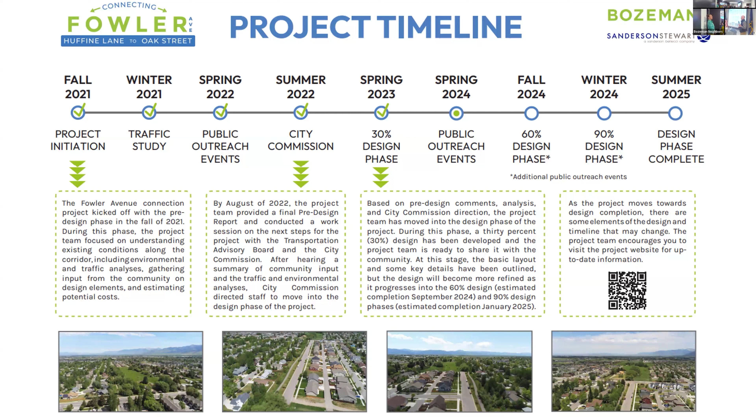Okay, so a little bit of our project timeline. This was one of the boards we presented on your way in. We started the project way back, feels like way back in 2021. Had about 1.5 years worth of engagement in pre-design effort planning phase.

Spent about the last 2 years in our early action design. That gets us to about 30% design phase. That's where we're at tonight. We're engaging right now through the beginning part of this spring, and hopefully have good groundwork to get our consultant, Sanderson Stewart, thanks for being in the room tonight with us, off to 60%, 90%, and target our first phase of construction in 2026.

Okay, so starting back, and again, we really wanted to hammer home how much we did learn from the community in the pre-design phase, not only about the project, but also about the actual engagement itself. So on the left side, that was all of our engagement efforts at that pre-design phase. And on the bottom, we took some really good comments and feedback from this group and from you guys about what we could have done better.

What we heard, a lot of folks didn't know the meetings were happening.

That's a problem, you got to know this meeting's happening in order to come engage with us. We used focus groups in the pre-design effort with stakeholders like HOAs, but some folks who weren't invited felt left out. We certainly didn't want that, so we nixed the focus groups this time. We had a great comment that when there's a site plan or subdivision going in, planning puts signs right there so folks passing by can see and know it's happening. We thought that was a great idea, and we wanted to offer opportunity for you to engage with us in a more formal setting. We heard that last time, so that's what we're doing here tonight.

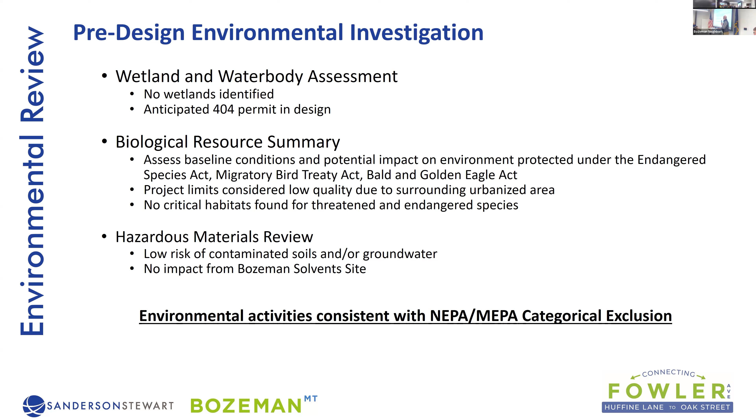At the conclusion of our pre-design phase, we ended up with essentially a list of demands on staff. When all your public comment was heard by the Bozeman City Commission, they did approve the project to move forward, but under a certain set of conditions. One: minimum or maximum of one travel lane in each direction, that's the big one. Left turn lanes will be added or proposed where required or necessary to help ease flow of travel and also safety.

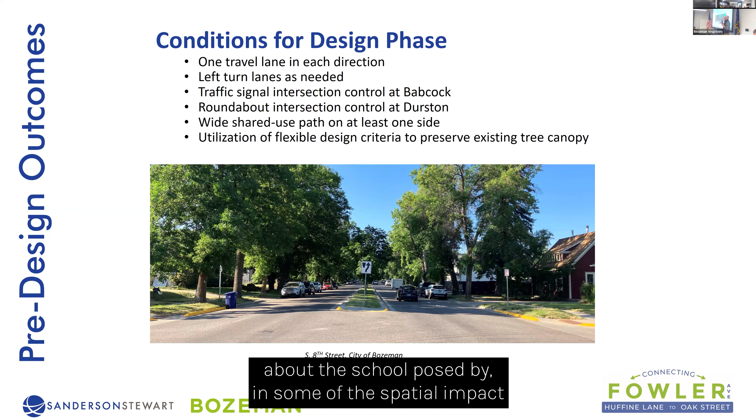We're going to propose a traffic signal be installed at Babcock, that was one of the concerns we heard. We had initially proposed a roundabout, but there were a lot of concerns about the nearby school and the spatial impact a larger roundabout would have in that area. We will be able to fit a roundabout at Durston that more closely aligns with the other intersections along Durston, whereas many of the Babcock intersections are signalized.

We're proposing a wide shared use path in at least one direction. All our projects follow our complete cities, complete streets policy, multimodality is heavily important in all of our corridor projects, and so we'll have continuous protected shared use path on at least one side of the street at all times.

And then finally, the last one is the big one. We heard loud and clear that it was not going to be possible or prudent to just run this 5-lane corridor directly down a straight path. So using flexible design to use available open space to shift the road in and out, primarily to protect the ditch corridor, the open ditch that's there right now, and the trees. That's the big part we hope you take away from our design as we present.

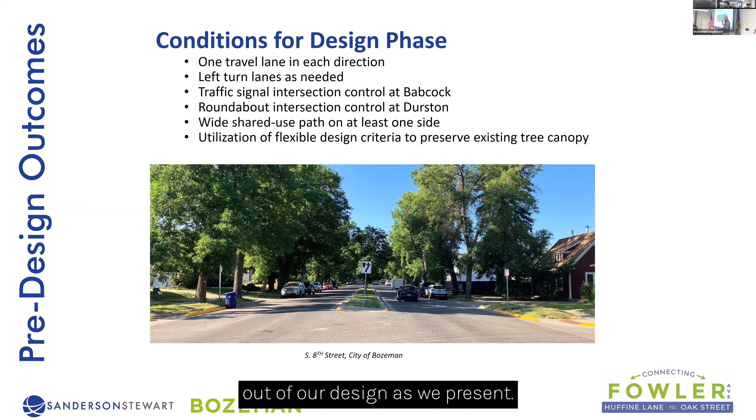Taking all of that into one: if you remember this graphic, this was our conceptual plan at the pre-design phase. You'll see multiple lanes, straight down the Fowler corridor, wide impact. We took your responses and comments and laid out what this could look like in design.

So we said a 2-lane typical section using the existing streets where possible, great idea, let's do it. And if you put a signal in at that point instead of a roundabout, also strong agree, let's go.

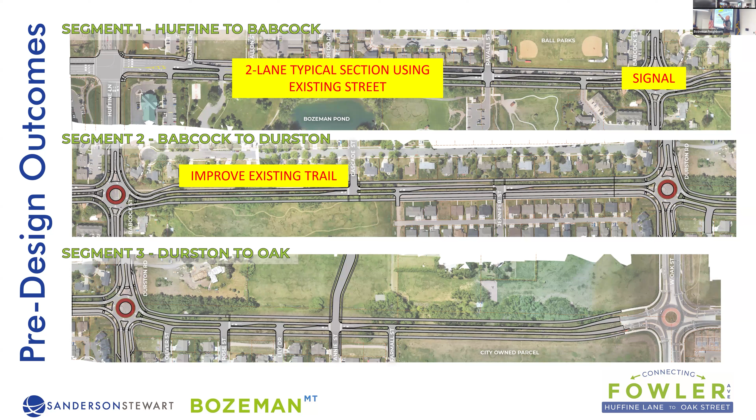Improve the existing trail. One of the critical parts of this corridor is from Babcock up to Durston. We heard loud and clear how much you value that tree corridor and existing trail. We will not be impacting that at all. The vast majority of those trees will remain. The only thing we might do, if agreeable to the community, is improve that trail by paving it.

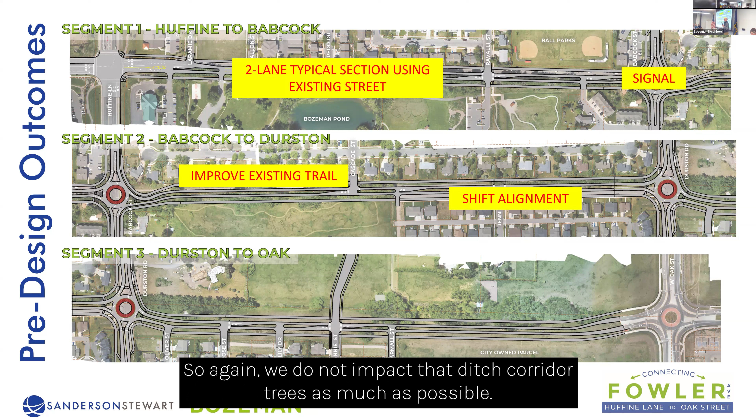That hopefully allows it to be accessible a little longer throughout the year. Then in a section where we shift the alignment, we again do not impact that ditch corridor and trees as much as possible. We also narrow the template as we go towards Oak, reducing the width of the impact. And the big one: maintain the open ditch. We agree, and so does the ditch company. The ditch is going to be maintained open.

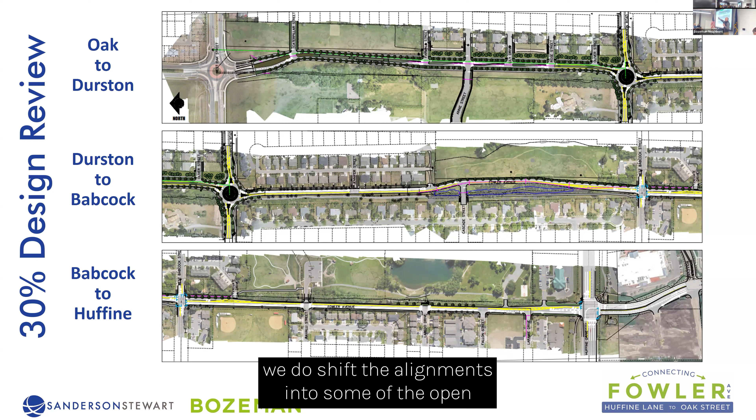That gets us to our new sketch and new map. We switched it around on you - Oak is at the top now. Essentially we took all the comments from pre-design and the conceptual design we had, and revised it to what we see now. As we go along in the next couple slides we'll get into more detail, but starting at the north at Oak, we shift the alignment into some of the open space that exists, so we do not have to pave over the ditch corridor there. That remains open, and the trees remain intact.

We have the roundabout at Durston that then takes us into the existing section of Fowler. We're going to build within curb to curb through that section, so it will not be widened at all. Parking will be maintained along the northbound side of the road for the residents that are there.

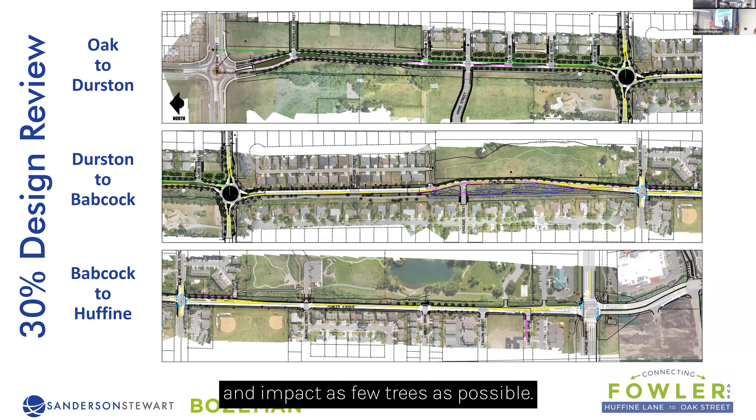Once we get into a bit more open space, we'll use that opportunity to shift the roadway again, to maintain the ditch open and impact as few trees as possible. Then we're back down onto the existing Fowler, south of Babcock as we come into Huffine. That section will also be maintained roughly within the curb to curb width. On the northbound side, if you notice, we don't have any curb there at all, so we will build that in. We'll get some stormwater management so we don't just sheet flow all the stormwater off into the ditch, and largely maintain that street as is.

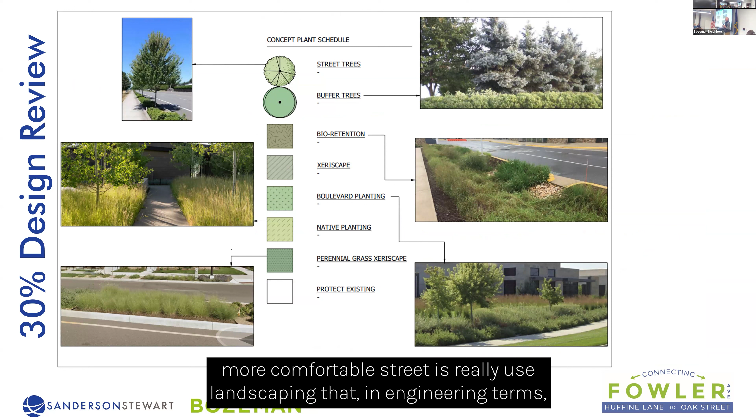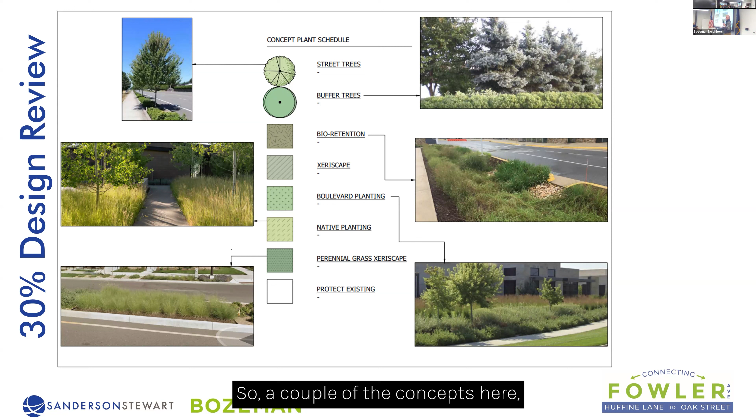One thing we heard loud and clear was that this corridor must be contextually appropriate. One thing we do to make it feel like a safer, calmer, more comfortable street is really use landscaping that, in engineering terms, creates friction to movement. If you pave this big wide stretch of street, it's going to feel like a big wide stretch of street, and that's going to lead to folks maybe not paying attention to the speedometer as much as they should. So we wanted to show early on in the design the landscaping concepts we hope to bring through to final.

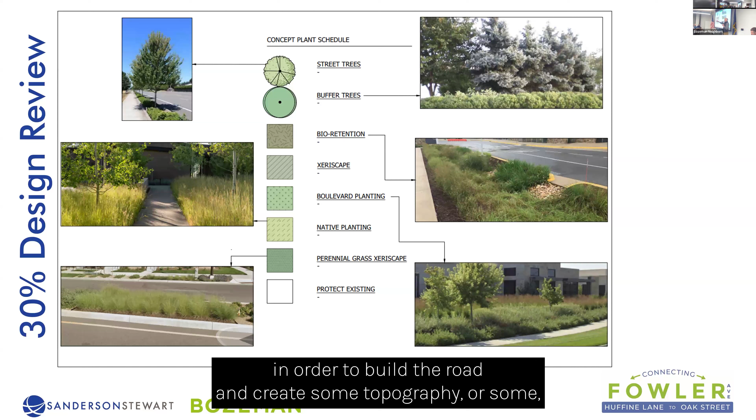A couple of the concepts here: we're using two forms of trees. We have our typical street trees, which go in what we call the boulevard of the street between the curb and the sidewalk. We're also going to utilize some hardier, larger trees we're terming buffer trees. The idea is to fit the road corridor within the space with as little impact to the adjacent homeowners as possible, using topography, maybe taking some of the strippings we have to take off to build the road, and creating some topography, swales and mounds, then planting trees around them. The goal is to keep the visual impact in terms of headlights, and as much of the sound and noise impact, away from the adjacent homeowner.

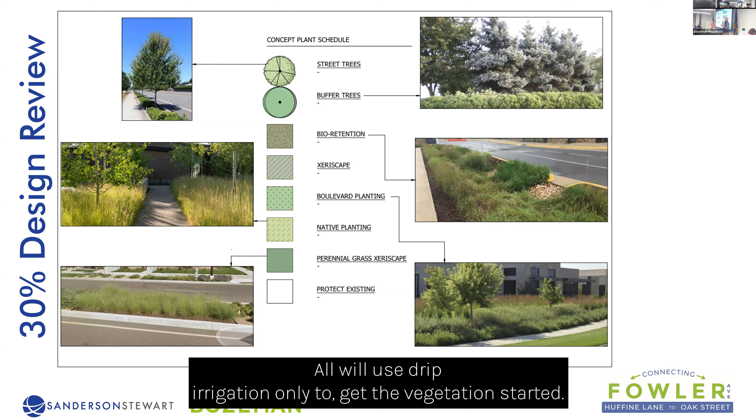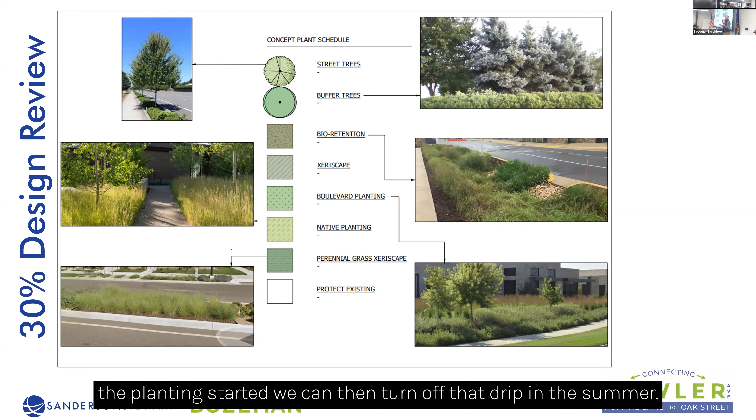So we're going to use vegetation to do that, as well as within the medians and the boulevards. We anticipate somewhere around 250 new trees to be planted as part of the project. We'll use drip irrigation only to get the vegetation started, using a term we call xeriscaping - low water demand type plantings, natural plantings, to really fit in with the natural and existing environment, and use as little water demand as possible. Once those trees and plantings have started, we've found in the past that we can then turn off that drip in the summer, and they should be able to be maintained throughout their life.

All right, so now we're going to do a bit of a segment to segment review. We're going to start all the way up at the north part of the project. These will be a snapshot of what that section of future Fowler may look like.

Each of these slides will generally have an aerial or plan view, as well as a section view underneath. The section view illustrates what the actual road might look like as you're driving, walking, or biking along it. The aerial view shows you from 10,000 feet what it might look like in plan. I want to go over some of the features for each segment as we go along.

Starting at the north end, we will have space to be able to build wide shared use paths in both directions, 10 feet wide. It will be allowed for walking and biking. It will go both north and south from Oak to Durston.

We have proposed to include a landscape median in this section. Our typical 3-lane section does have a median to allow for the left turns. We do have space here. However, we will consider, if it's in the interest of the community, tightening that back up into 2 lanes, like some of the other sections as well.

We do propose one full access point at Annie Street. Annie would be proposed to connect from the subdivision to the west or to the subdivision to the east.

And this one we note - well, first of all, we will propose a roundabout for intersection control at Durston. And then we do note that this section does require some right-of-way to be purchased by the city.

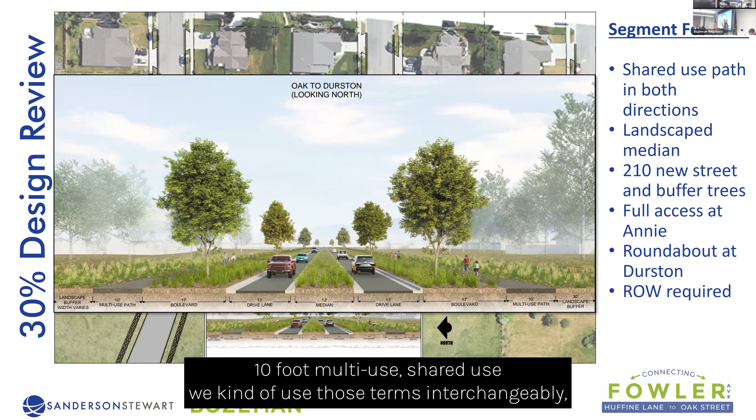We've already received some comments that it might be worth tightening those up to be a little bit narrower, something that we could very well investigate going into the next phase of design. And then those are 10-foot multi-use, shared use paths - we kind of use those terms interchangeably - on either side.

Okay, so coming back now towards our south one section, Durston to Babcock, this is where we get to have a lot of fun.

This is one where the first view on the top is going to show that existing portion of Fowler, and the bottom view is going to show the one where no road exists today. So a couple key features along the segment.

Here's where we run into some challenges. If we were to extend both directions of those shared use paths that we start out at Oak, it would require some pretty significant impacts to the tree corridor and the home frontages along Fowler.

That's something that we heard loud and clear was not wanted by the community. And so what we want to make sure we do here is have continuous bicycle facility, both northbound and southbound. What we're going to do to try to thread that needle and not have as big of an environmental impact while still maintaining that is use on-street bike lanes in some portions, to use the existing pavement we have in order to still allow you to continue north and south without necessarily having to go outside.

So on that north section, we will maintain the street within the existing curb-to-curb width, so no widening at all in the existing part of Fowler there. It will be a 2-lane section through this full Durston and Babcock stretch.

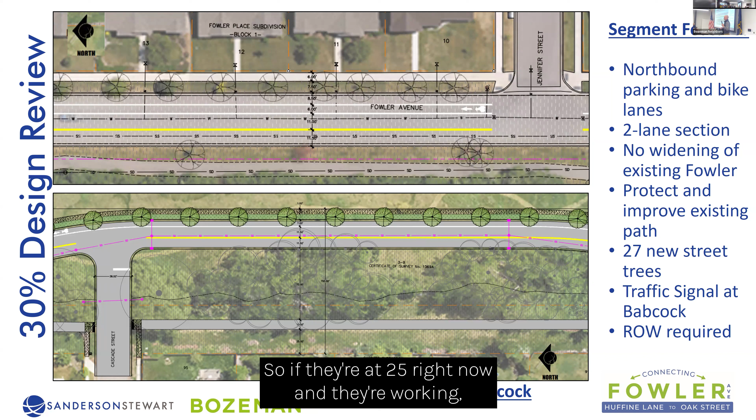So we went through an engineering evaluation. We reduced speed on over 11 miles of street, and we are making more consistent speed limits between the different street types. So as a minor arterial, all of our minor arterials are set at 30 miles per hour maximum. One thing we're not going to do, though, is increase speed limits in any sections where they're less than 30 right now. If they're at 25 right now and it's working, we certainly aren't going to encourage faster speeds by raising the speed limit. Those are usually areas adjacent to homes and parks — no need to be going 5 miles per hour faster through there.

And again, here's a section view. If you can read the fine print, that is the existing roadway width of Fowler as it comes south of Durston there. So that's the existing path on the left side, existing Fowler. What we'll do there is take the existing space, maintain the parking in the northbound direction adjacent to the homes, stripe in a 6-foot bike lane, a bit wider than our typical, and then allow 2 lanes of traffic to flow from there.

Then on the southern section, you'll note that we are preserving the existing tree and ditch corridor. The existing path is to the left of that. We do propose to pave that — we hope that's seen as a positive thing for the community — and then run the street as a 2-lane corridor with that bike lane continuing north and south.

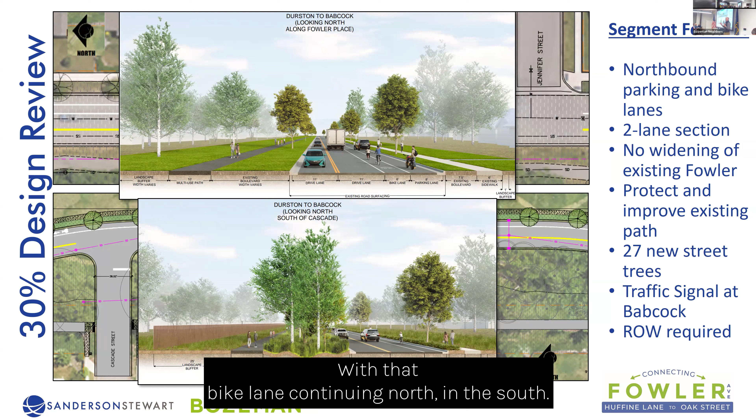And that gets us down to our final section to the south. At the top of the screen, you'll see Babcock Street is the intersection at the left. That, as a reminder, is proposed to be signalized, so no roundabout there. We heard concerns about the school next door, and even just the spatial impact that a larger roundabout would have at that location. So we're able to save some more trees and reduce some of those tensions with roundabouts by going signalized here. We also note that many of the intersections along Babcock are signalized instead of roundabouts, so that consistency and continuity can be seen as a positive thing as well.

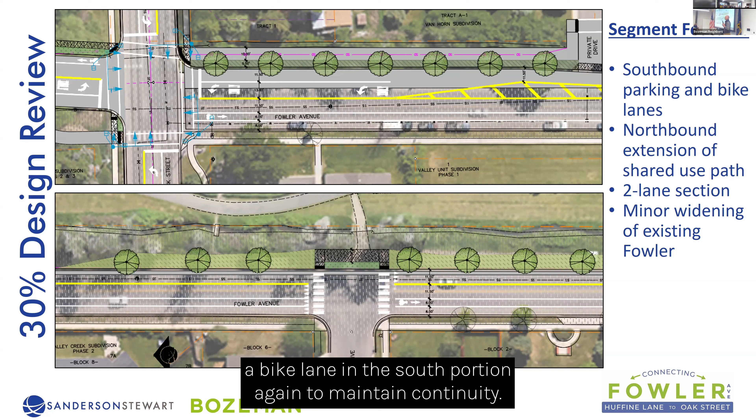Some key features here in this direction: southbound parking will remain, there by the park to the north and the ball fields. Parking will be maintained through that section so folks have somewhere to park and don't end up in the neighborhoods. We will be proposing to stripe a bike lane in the southbound direction, again to maintain continuity. However, in the northbound direction, we're going to utilize the existing path through the park, improve that, and extend it northward. So there's multimodal connectivity in both directions, using as much of the existing features as we can.

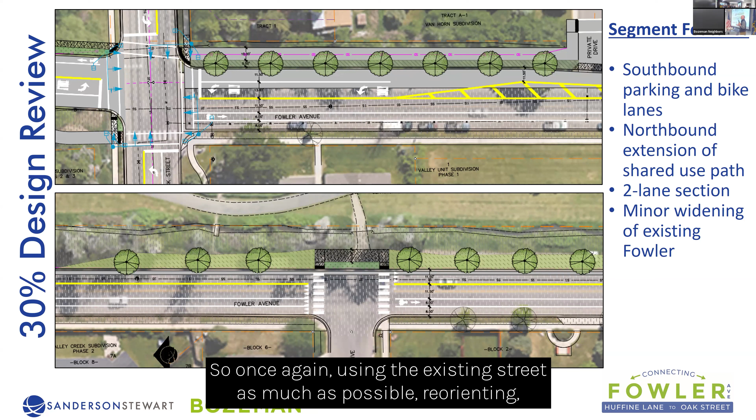In this section, we will not be proposing to widen the street much at all — really just putting curb and gutter on the northbound side to control the stormwater. There will be some minor widening to add a turn lane going up to the intersection with Babcock, but that will be all we expect to widen through this stretch. So once again, using the existing street as much as possible, reallocating — as we call it in engineering terms — street space to allow for parking on the southbound side, bike lane on the southbound side, and 1 travel lane in both directions.

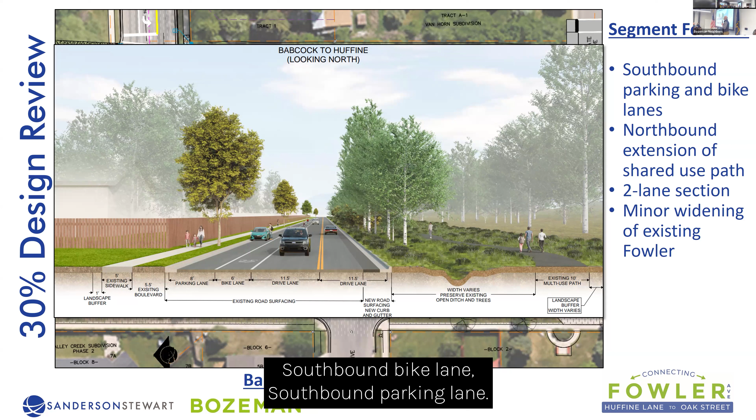What that looks like in section view — again, this would be looking northbound. So from Huffine, you'd have 1 drive lane northbound, 1 southbound, a southbound bike lane, and a southbound parking lane. We leave the boulevard, the trees, and the existing sidewalk in the southbound direction as is, then improve the existing trail multi-use path going in the northbound direction. The ditch corridor will remain open through the stretch, as will the trees.

So you'll see one of the impacts of using more of that context-sensitive design is that we will require the road to have a greater amount of right-of-way.

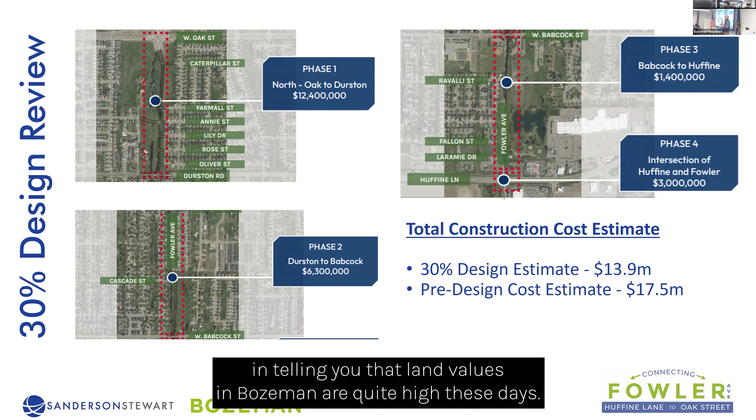Probably not going to surprise anybody in telling you that land values in Bozeman are quite high these days. That means our right-of-way expenses have increased significantly for this project as well. However, the good news...

At the pre-design phase, we estimated a construction cost of about $17.5 million for the project. Based on a lot of the feedback we heard, right-sizing the template, using existing streets we have, and taking one of the roundabouts out in favor of a signal, we were able to cut almost $4 million off the construction price, as we've seen year on year 10+% construction cost escalations. So we're going to be able to not only preserve more of the existing corridor, but also save the project fairly significant cost as well.

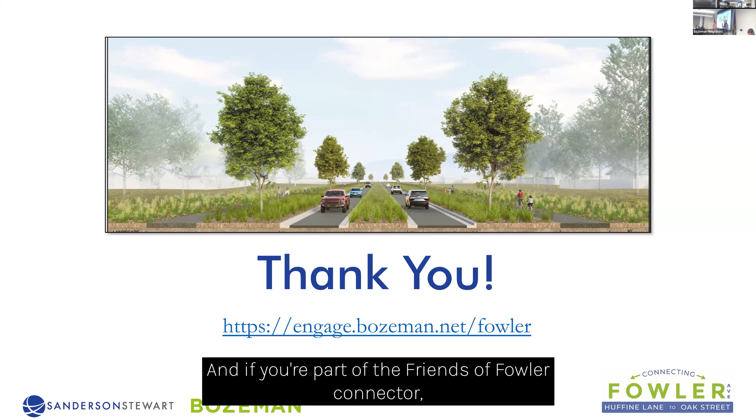Joey: All right, we're consolidating some of these, so we'll go through a list. There's people online too, so hopefully we'll hit everything by the end of it. First question, or a few questions—ask it into the mic, please. Thank you, of course. First question, consolidating a few things here: in terms of costs, there's a few questions about taxes going up, who's paying for the project, and timing of construction.

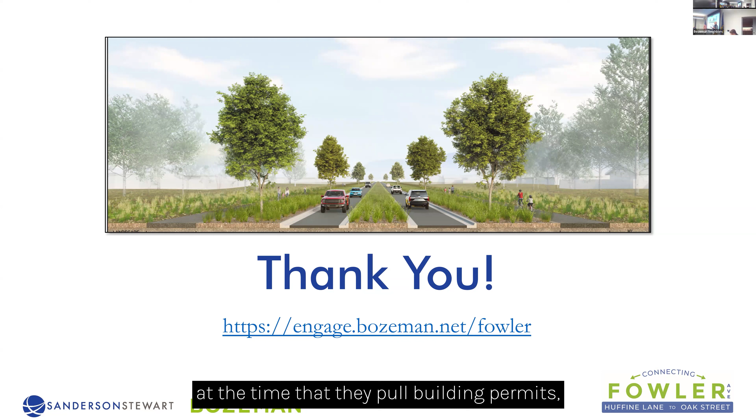Okay, so questions about the cost estimate and how the project is funded. We are using two main sources of funding for this project. First and primarily are what are known as street impact fees. Those are what we collect from developers at the time they pull building permits. They're assessed based on the traffic impact demand they're expected to generate, and can only be used for what are called capacity expanding projects. Essentially the state says, okay city, you're allowed to take those fees from the developer, but because you're taking them due to the traffic impacts the development is causing, they have to be used to ease some of those impacts. A lot of development has happened on the west side of town, sending trips up and down, north and south, along what will be Fowler in the future. Right now it's either Ferguson, 19th, or a lot of your local streets. So all that development is paying for the majority of the project.

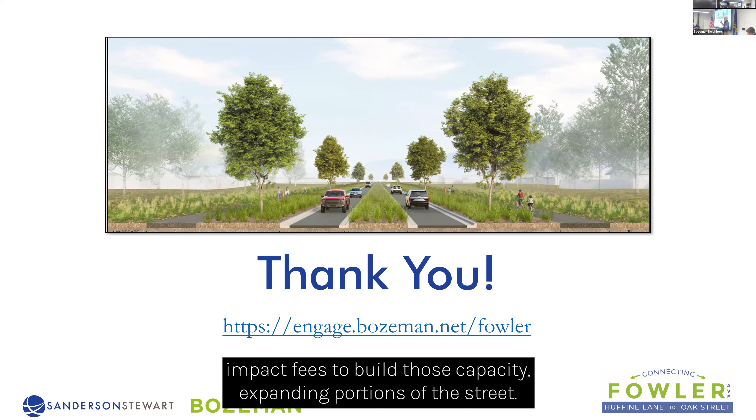Coupled with that is what's called our arterial and collector district—an assessment to the property owner. That was established because the state says you can only use impact fees to build the capacity expanding portions of the street. So each project that uses impact fees has a portion that would be the typical local street that the state says the city has to go build themselves. The minor portion of the cost will be from the arterial and collector assessment district; the majority will come from impact fees. No property taxes—and I know that's a little contentious, we understand it's all the same check you write whether it's an assessment fee or property tax—but no general fund property taxes will go to pay for the project, only the assessments for transportation and from development.

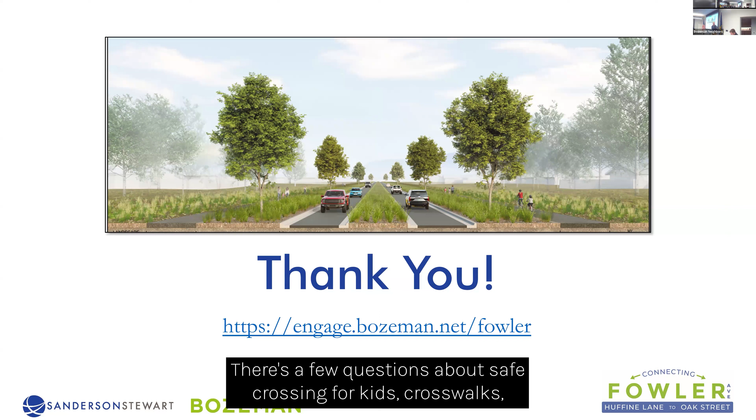Next few questions are focused around street connections. Are all local street connections needed? Can some of those remain as is, not connecting to the new facility? There's a few questions about safe crossing for kids, crosswalks, specifically at Jennifer. And then there's a follow-up group of questions regarding maybe traffic calming into Ferguson Meadows with the Cascade connection. Okay, great questions, we've heard that from a number of folks already.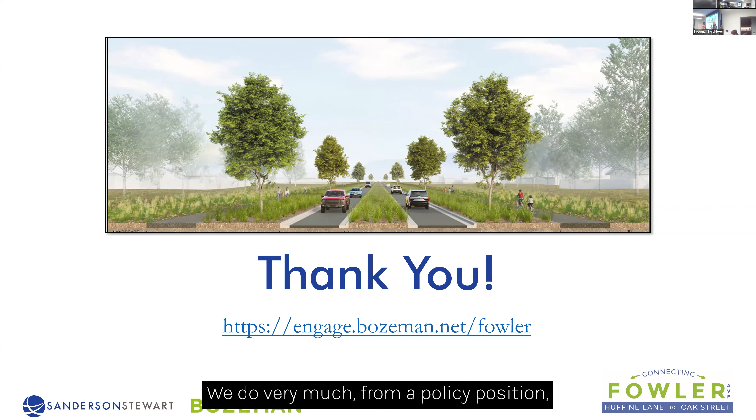As we go into the next phase of the project, I'll start with our policy. We do very much, from a policy position, encourage connected neighborhoods. For our neighborhoods to be connected, the streets have to be connected. Fowler is a minor arterial, so the intent is for this corridor to take the majority of north-south traffic from the neighborhoods in the area. For that to be successful, the local streets do have to be connected into it. We do, however, very much recognize that that causes a good bit of concern by folks who might be worried that people are going to use those new connections as cut-throughs.

In the next phase of the project, we're going to evaluate what we call those secondary impacts and look to come up with either traffic control, meaning maybe some more four-way stop signs, or traffic calming, such as curb extensions or traffic circles on the streets that are connecting to the future Fowler, to make sure any of that additional traffic demand is mitigated in your neighborhoods as well.

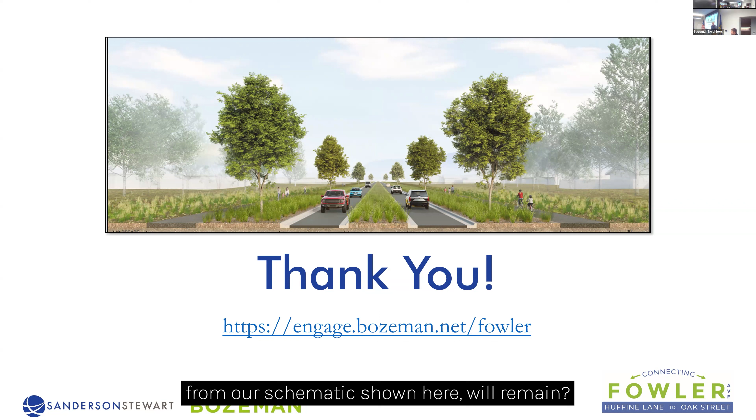I could probably answer this one a little easier. There's a few questions about the middle section, which is south of Sanderson through Babcock. Questions regarding how many of the existing trees from our schematic shown here will remain, and similar questions about how much of the open ditch will remain.

From our estimates, we're looking at keeping 150 of the existing 200 trees through that middle section, in addition to adding 250 new trees. So that's what we're showing on the graphics today.

In terms of the open ditch section, again of that middle section of roadway, we're estimating about 400 feet of piping, mostly at the connections between the intersections of Babcock and connecting to the north of the existing Fowler. That leaves 850 feet of existing open ditch in that middle section, trying to maximize as much as possible with the road grades and tapers. Then to the north section, we're looking to retain all of the ditch heading north.

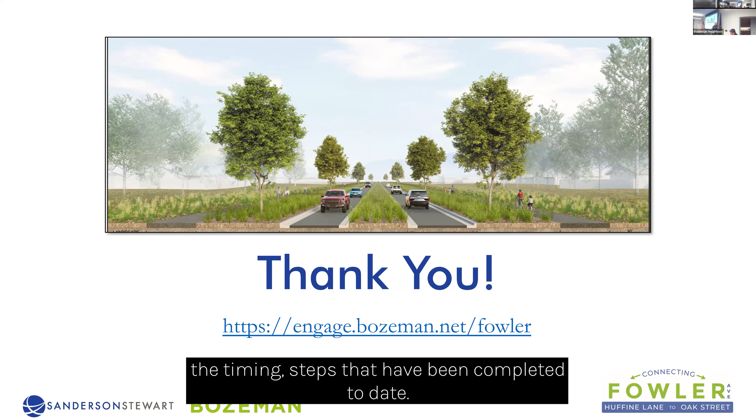Nick, one question for you. You touched on annexation and a few of the properties and needed right-of-way. Can you maybe elaborate a little bit further on the process, the timing, steps that have been completed to date?

Sure. So there are three main private property owners along the corridor that will need to come to agreeable terms with on right-of-way acquisition in order for the project to advance. We have been in discussions with them for the last 2 years, and those discussions for acquisition will continue. Hope everybody can respect that those are private conversations, so I can't necessarily share terms, but we are in communication with all and will not be intending to use eminent domain, so not taking any property, coming to fair market value agreements with all that have property that we need to build.

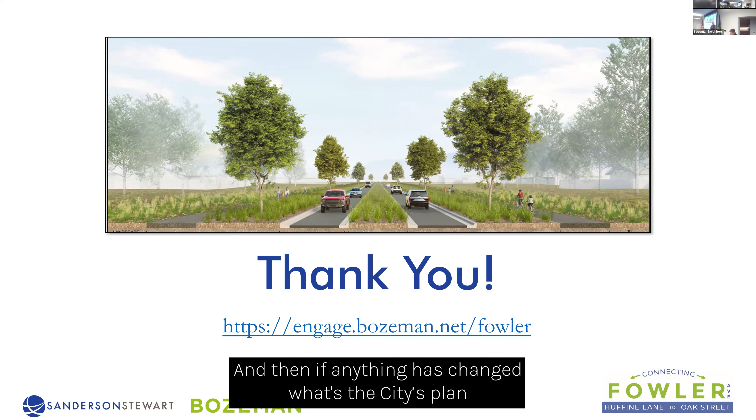There's a few questions here, and I heard a few questions at the start of the meeting on the poster boards regarding the north segment between Oak and Sanderson, where there's a lot more flexibility with our cross section of roadway. So there's a few questions asking about options to remove the multi-use path, to provide more buffers, looking at fencing to provide buffers, and then if anything has changed, what's the city's plan with the excess right-of-way, park, natural habitat.

I'll try to take those one by one. We do intend to continue the shared use paths in both directions for that stretch of the road. That stretch is where we hope to use some mounds or topography and trees, vegetation in place of fences in order to buffer the road from the neighborhoods adjacent to them. Again, though, those are detailed final design type discussions that we'll continue having through 60 and 90% design as well.

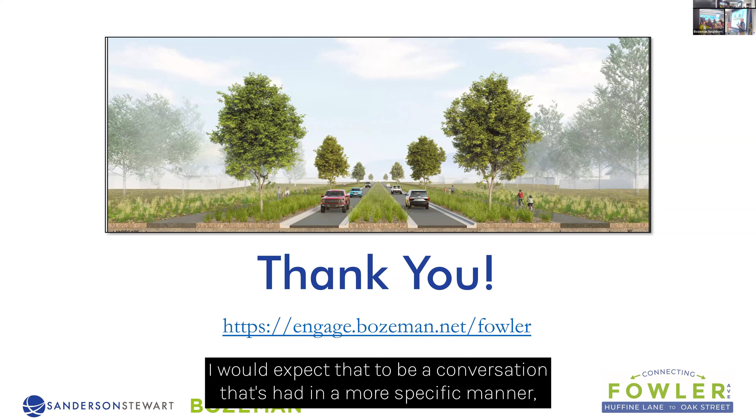As far as the open space at the far north end, the city owns the large parcel that's open right now as you approach Oak, in the southeast corner of the existing roundabout intersection. City Commission has in the past instructed staff to investigate potential affordable housing options for that location. We have nothing in the works currently, but if the project advances, I'd expect that to be a conversation had in a more specific manner from there. So no commitments to date.

However, open and transparent, that was one thing discussed at the pre-design phase, and those ideas continue to germinate, and we'll see.

Might get a quick point of clarification. You've talked about the paths being directional, but in what you're showing here on this section, a person could ride their bike in either direction on either side of the street, correct? Yes, correct. So the question was to clarify our shared use paths - you can ride, walk, or bike them in either direction. I've been using northbound, southbound in terms of what side the prevailing traffic is going. Apologies, I'll use east and west for the corridor to hopefully clarify.

Will the Huffine and Fowler improvement include reprogramming of the light for a protected left turn for Fowler southbound traffic turning onto Huffine?

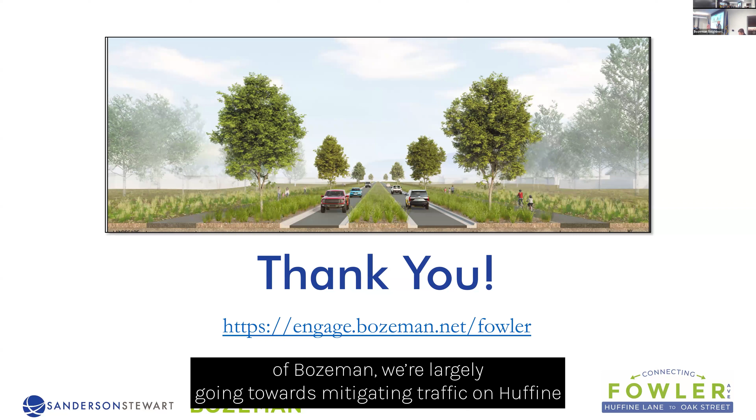Excellent question, a bit of insight. We do project the Fowler intersection improvement at Huffine to cost upwards of about $3 million. From my position representing you, the people of Bozeman, that's largely going towards mitigating traffic on Huffine. Huffine you do not own as residents of the city of Bozeman - that's a state route. I have some concerns over spending $3 million of city money to improve an intersection that's largely going to benefit traffic that's supposed to be mitigated by the state.

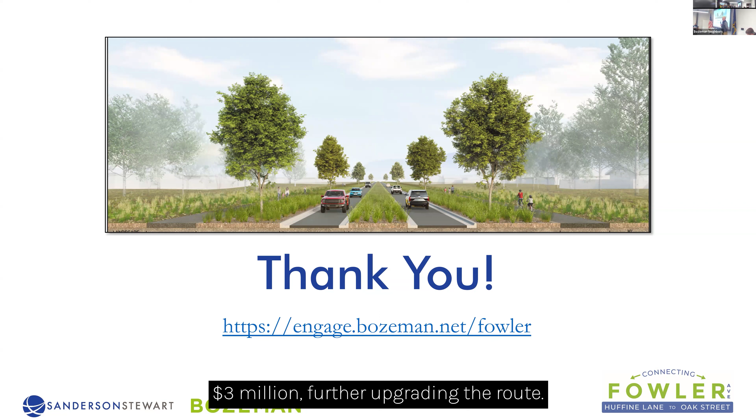One thing our analysis has shown is that intersection currently warrants protected left turns. That will be my intent to try first, before we find out whether we need to spend $3 million further upgrading the route. So once things get connected through, I'm going to do my best to work the city magic and get that signal reprogrammed first before we spend any real money.

All right, our next question. There are a few questions asking how this project plan ties into the sensitive lands that the commission recently adopted. The report states there's crossover between the plans that will be added. Similar questions - have trees and wildlife habitat been considered in the context of the sensitive lands?

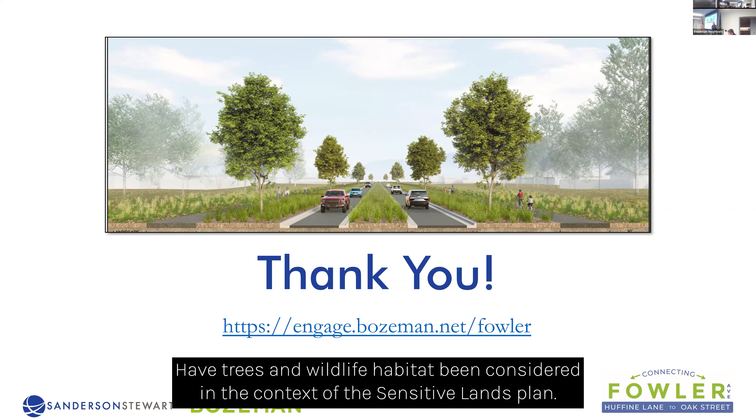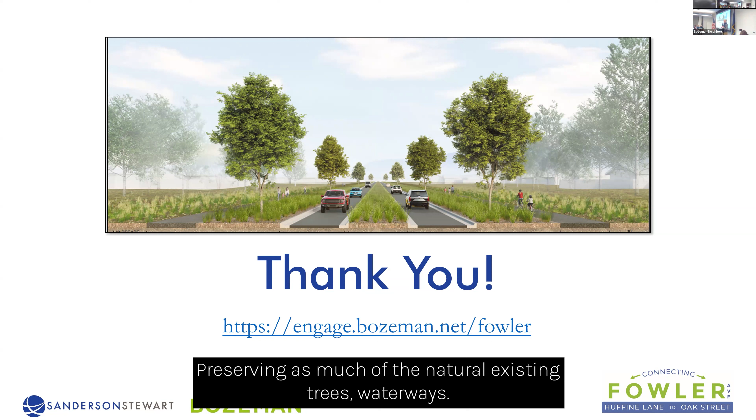Great question. We always try to make sure all of our plans and projects are connected and represent one another. A lot of the features - right-sizing the roadway, keeping the ditch open as much as possible, preserving as many trees as possible, shifting the roadway off - all speak to the goals of that sensitive lands plan, mitigating as much of the environmental impact of development as possible, preserving as much of the natural existing trees and waterways. Those are all central tenets of that plan. We hope our 30% design speaks well to those goals, and are certainly open to comments or suggestions of things that can be tweaked to make sure we're living by that plan we made last year.

Switching topics here, there are a few questions about fire response times. Are there any concerns about the reduced lane size limiting these times? Will the roundabout at Durston affect any sort of response times through that area?

Great question on emergency responses. That was one of the main reasons we had for continuing the project - to connect this corridor and greatly improve response times. We built a brand new fire station just north of Oak there on Davis. So we do not have any concerns from our fire department about potential reduced response times if we go to that 2-lane section. The roundabouts will be designed with what we call the central apron to be mountable for those large trucks, and they've found they don't have much issue getting through them.

One of the benefits to having that turn lane is it gives somebody the opportunity to get out of the main flow of travel. However, I'm not going to be a stickler on that - we don't expect 20,000 cars a day on this stretch of Fowler, so we feel like those concerns can be mitigated.

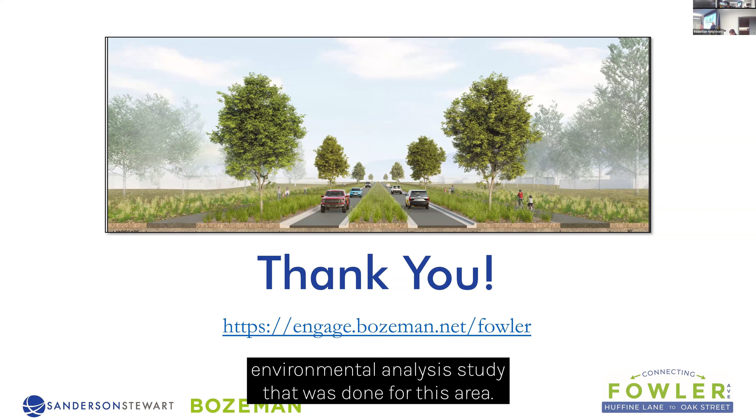There's a few questions regarding the environmental analysis and guidelines. Back in 2021, at the commission meeting, there was information brought up about a 2001 environmental analysis study done for this area. Can you talk a little more about the specific design guidelines we're following to protect this? And maybe compounding on that question, are there any other city plans to have future dedicated green space on this west end?

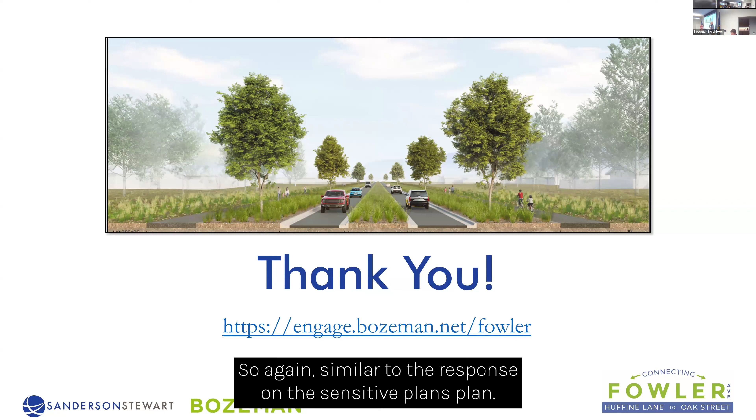Couple more questions. So again, similar to the response on the sensitive lands plan, using that context sensitive design to avoid as much of the impact to the tree corridor and the open channel ditch as possible is our attempt to thread that needle of still providing the transportation function while also trying to protect as much of the existing environment as is there right now.

In terms of future corridors on the west side, I don't know that I personally am aware of any. One thing we try to do as subdivisions annex in and build is align park space along waterways and ditch corridors. Similar to what's just east of the Fowler corridor through West Winds, Harvest Creek, some of those subdivisions take an existing ditch corridor and build a linear park out of it. One is already starting to be built along the Cottonwood corridor area. That's all I can share at this point as far as what linear open space type parks would be planned for the west side.

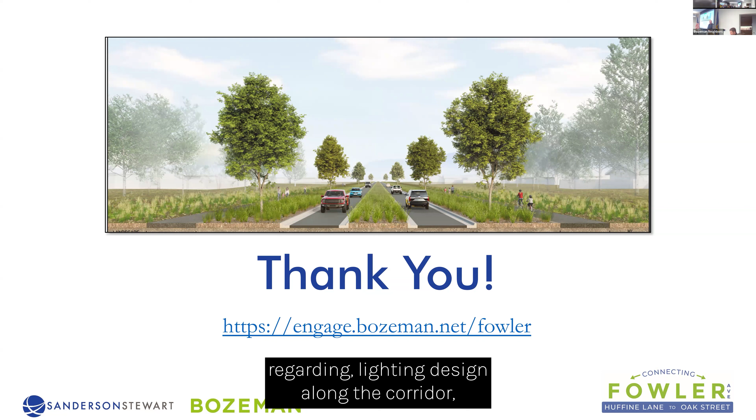I think there's a few questions regarding lighting design along the corridor, ensuring light pollution is mitigated, and some questions specifically about the roundabout, car headlights, lighthouse effect, kind of shining in. Maybe touch on some of the design features there.

The question generally regarding streetlights - you've probably gotten more comments on streetlights since I got here 3 years ago than anything else. We've adopted new standards that turn down the temperature a bit and also add shields for all our streetlights, so they should be directed straight down, hopefully into your house as little as possible. The other part of the question was about headlight impacts at the roundabouts specifically. Our attention to detail as we get into final design is going to really use topography and vegetation as much as possible to reduce some of that glare, some of that impact. Other options such as fencing could also be investigated as well. We'll need to know more at that final design level before I can share much more specifics.

We have one follow-up question from the crowd. I have a question that piggybacks on that one. When you talked about the boulevard trees versus the buffer trees, and you're doing 250 trees, do you have any idea what percent of those might be evergreen versus deciduous? Because as we know, a lot of the year our trees do not have leaves on them.

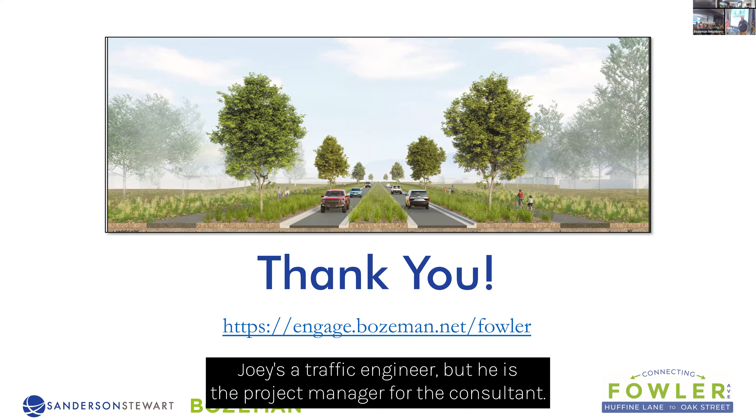Joey's a traffic engineer, but he's the project manager for the consultant. Might Joey have a response? Yeah,

I think at this stage there's all options on the table. Some of the graphics you've seen in the back aren't set in stone. We're just trying to show a visual of the impact that a tree network can provide to a corridor. So I don't think anything's been decided at this point. More to come, I guess.

And I think the idea was those buffer trees would be more coniferous, so provide really more of that year-round buffer, with deciduous ones for typical street trees in the boulevard.

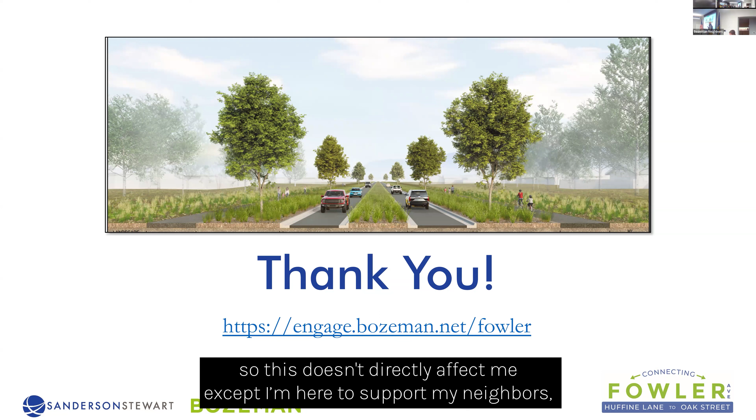Follow-up question. Just to follow up here, I live on the east side of Park Street, so this doesn't directly affect me except I'm here to support my neighbors on the west side, and they were very, very close to this new design. I appreciate all the work you guys have done to use the right of way and those sorts of things, but noise is going to be a big issue from our subdivision. I would encourage you to look at not just trees, but also understory noise-reducing plants like junipers and service berries, because they provide much better noise attenuation than trees do. You should include those, not just trees - it should be a buffer in depth for those folks who are directly affected.

For those online, the comment in the crowd was around different types of plantings, vegetation that could be used to mitigate sound. Very well received, and that's something we're fine with.

Got a couple more coming for you. A few questions are regarding future expansion, both of the roadway width - will it be expanded to a larger facility in the future - and specifically looking at the Babcock signals proposed to be a roundabout.

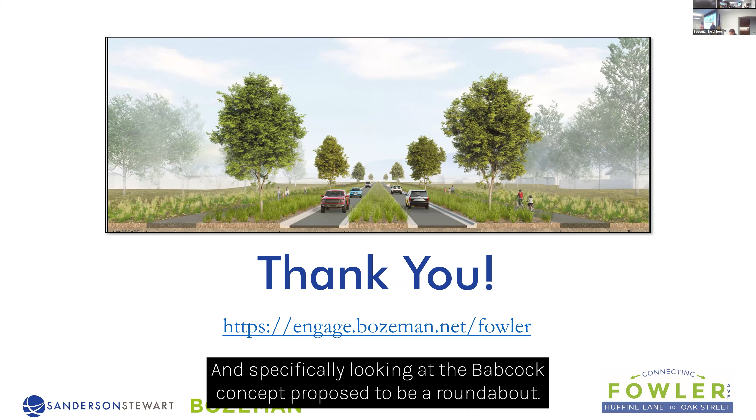Not in any of our lifetimes, and hopefully none of our kids either. We don't expect, even in our most aggressive traffic projections, to require anywhere near that capacity.

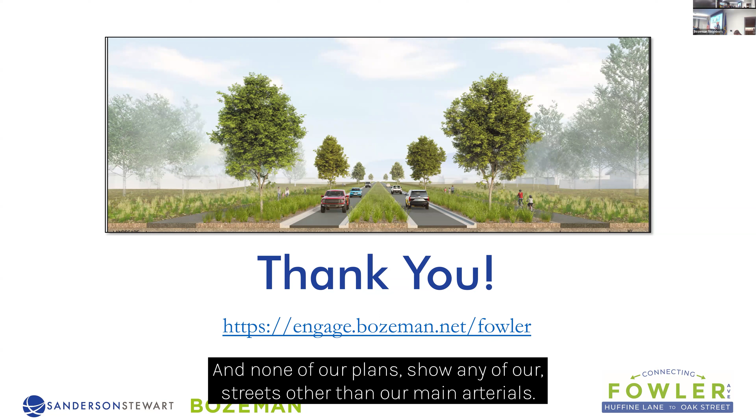So cars turning left would be blocking cars going straight. In order to really justify anything wider or bigger than that, you'd need to get into the 28,000 vehicles per day range. And none of our plans show any of our streets, other than our main arterials - Huffine, Oak, 19th, Kagy - unfortunately carrying that much traffic in the future.

Certainly it's not my interest, nor is it in the city's plans, to widen Fowler any wider than what's being proposed here. Nor would it be in our plans to spend a couple million dollars to build a signal right now, when we don't have all the money in the world to turn around and convert that into a roundabout either. So I can confidently say no additional expansion from what is presented.

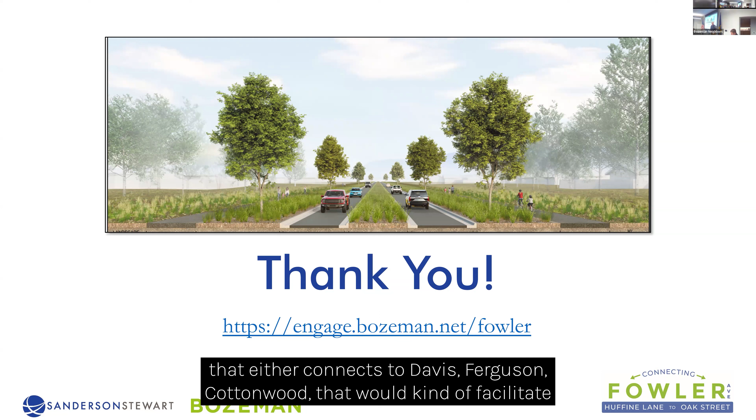I guess I had one more kind of crystal ball, big long-term future plan question. Is there any master plan that calls for an interchange at I-90 that either connects to Davis, Ferguson, or Cottonwood that would kind of facilitate major growth along this corridor?

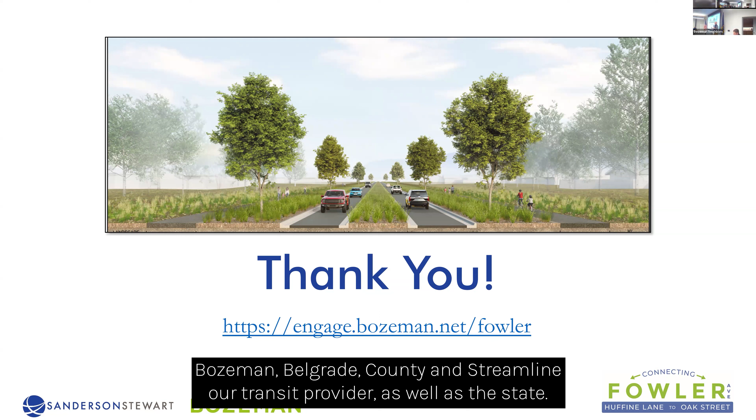That's a long range topic there. We are not aware of any plans the state transportation department has for additional interchanges along I-90 in the west part of town. We do now have a metropolitan planning organization between Bozeman, Belgrade, the county, and Streamline, our transit provider, as well as the state. Those sort of bigger regional type projects would be planned and managed by that organization. So the city itself certainly does not have any plans for additional interchanges and wouldn't expect this to need one.

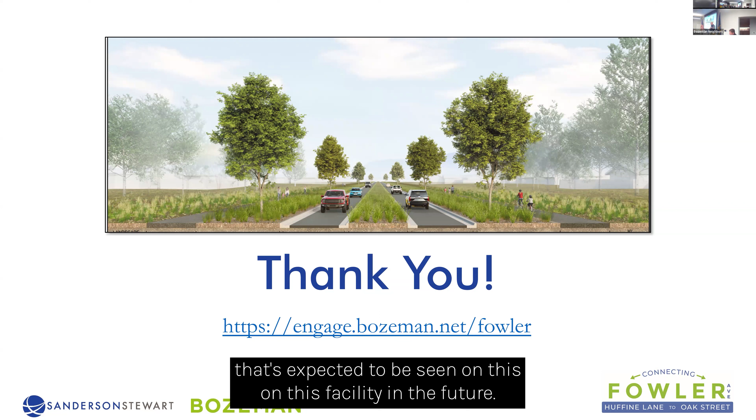All right, I've got one last one that I think I can answer best with some things we pulled up here. So the question is regarding what's the expected ADT, or average daily traffic, that's expected to be seen on this facility in the future. Part of our pre-design effort was to outline both existing traffic volumes and operations, as well as try to model the 20-year horizon.

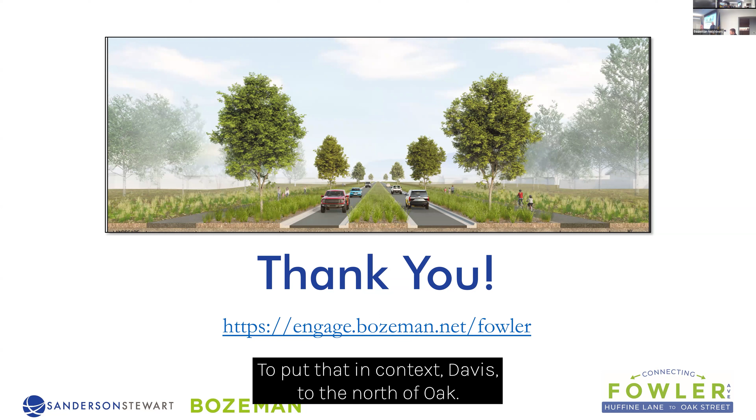To put that in context, Davis to the north of Oak is about 15,000 vehicles, so we're projecting fewer vehicles than to the north. Oak Street is about 15,000 vehicles as well, so kind of lower volume thresholds than those two facilities. That's all future projections.

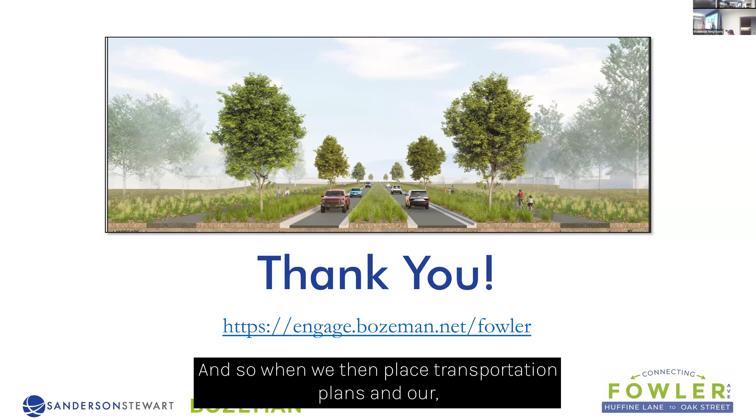20-year future. And one thing I'll add to that too - we're in a bit of an awkward time in long-range planning, in that a lot of the planning documents we have show a pretty wide planning boundary. And so when we then place our transportation plans and our water resource plans along them, they tend to show a lot more demand than we may have enough water rights to support.

So even numbers such as that are really presuming that we did eventually, 20, 40 years from now, build out the edges of our planning boundary - but that's far from certain that we'll be able to do that. So I don't mean to mitigate some of those numbers. I know they are large and scary, but I would very much expect those to be worst case scenarios.

One thing we see is per capita, our individual travel is not increasing year on year. We spent decades as transportation engineers just presuming everybody's going to drive a little bit more every year, and what that's led to is us over-projecting a lot of traffic volume for streets. So what we do in the city is only project volumes based on the known demand that's going to be generated from development when it comes in. If that demand ends up being less in the future, so will the trips, so will the traffic.

That's all we have. There was one question about a slide.

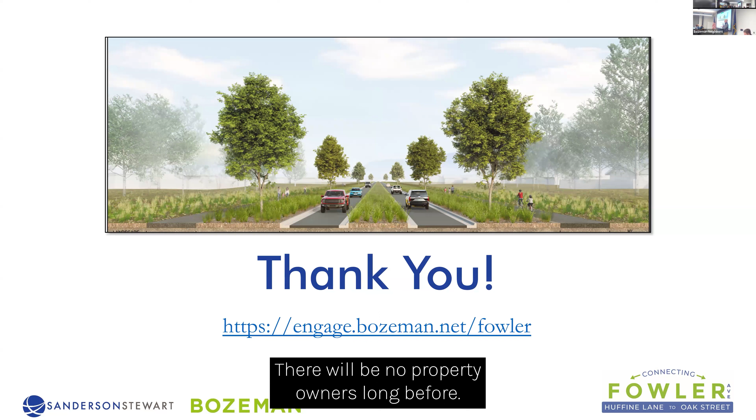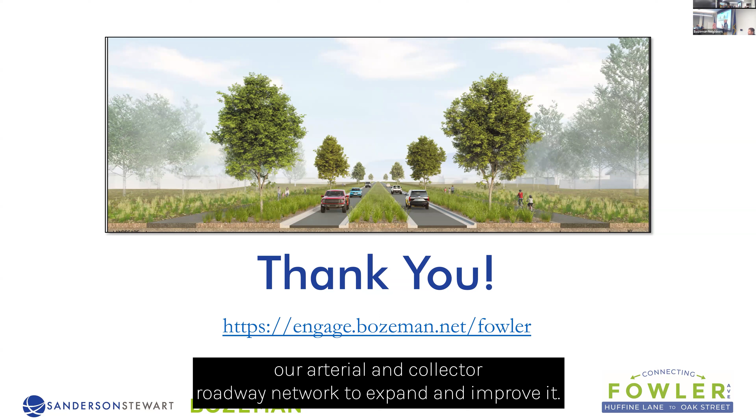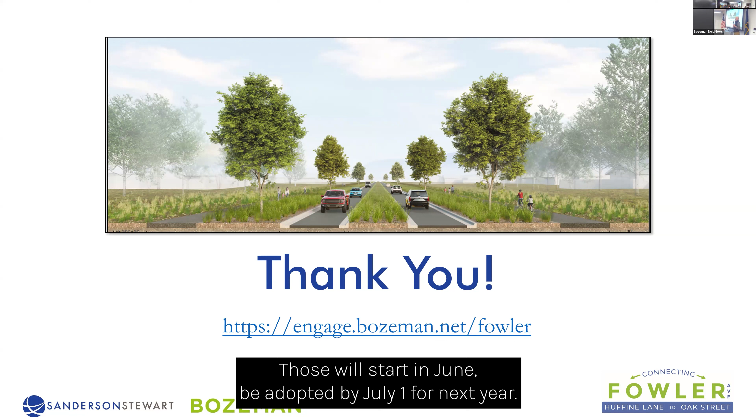So that's spread across all citizens of Bozeman. What would that price be, like for a $100,000 home? I would have to unfortunately direct you to your assessment bill. If you didn't pay it all in full, you were reminded last week to pay up by the end of May in that vote as well. It would be found along there as well. That discussion would also be held at our annual operating budget sessions with the commission. Those will start in June, be adopted by July 1 for next year.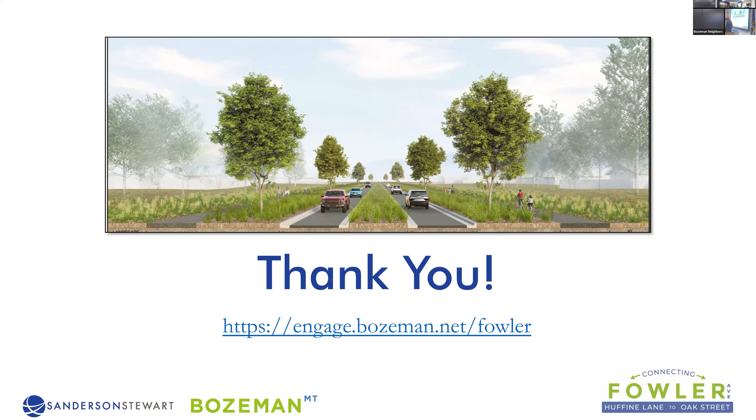All right, I believe it was this one, ma'am? Can I just ask a question about this space right here? Is that going to stay, and is that trails? So the question was about the parts of land as you approach Babcock to the east of the future Fowler Corridor. That is one of our private landowners. I certainly don't control their interests in their land and won't speak to them either, so the city would not have really any impact or discretion over what they do in the future.

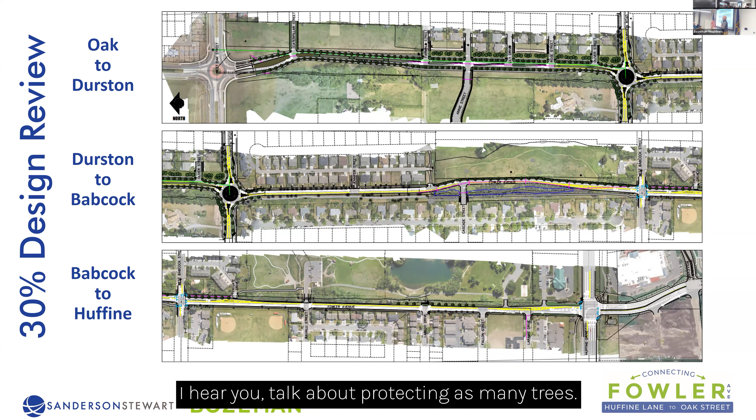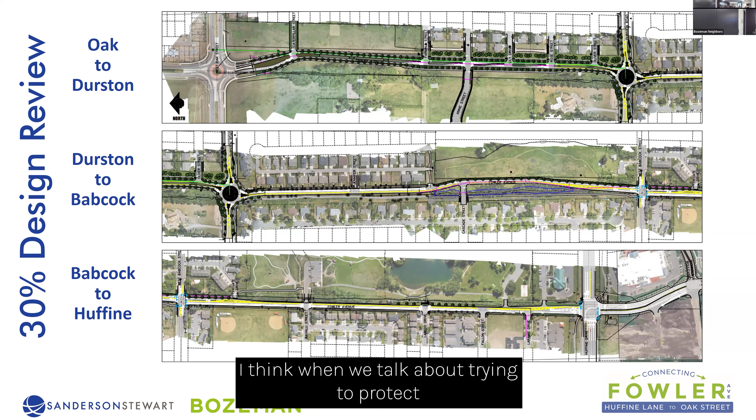One here and then one here. I heard you talk about protecting as many trees as possible. I heard you use the term buffer trees, but I think you're using that term differently than the question I have about buffers. I didn't hear you say, along the existing riparian forest, what size buffer are you using beyond that?

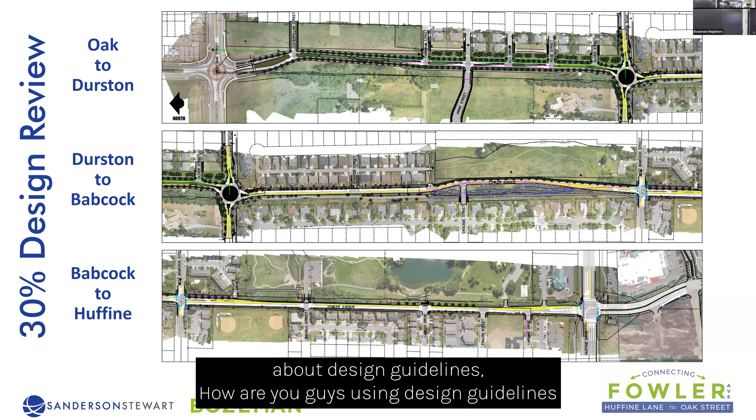Typically, when we talk about trying to protect riparian areas, reduce pollution runoff, and protect some of that habitat and ecological function, we're talking about a 50-foot buffer beyond the edge of the tree, and I'm not sure if I saw any slides that do that. Can you speak a little more to that? And then, leading to the question about design guidelines, are you using design guidelines to help determine those appropriate buffer zones? Follow-up: do you have ecological experts on your team to help inform those discussions? You know a lot about the engineering, but real specific expertise in ecological protection, because we know it's not enough to keep the tree standing—there needs to be some work. Thanks.

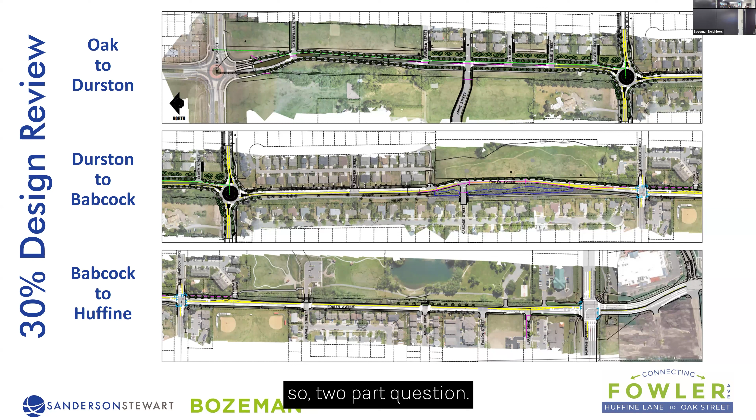Two-part question, I'm going to do my best to restate. The first part was about buffers along the ditch corridor, along the waterway corridor to the actual road itself. We are following City of Bozeman development standards—30-foot minimum from top of bank. That's what the blue box is. So, yeah, 30-foot minimum off from the ditch corridor itself, edge of bank. That's the minimum.

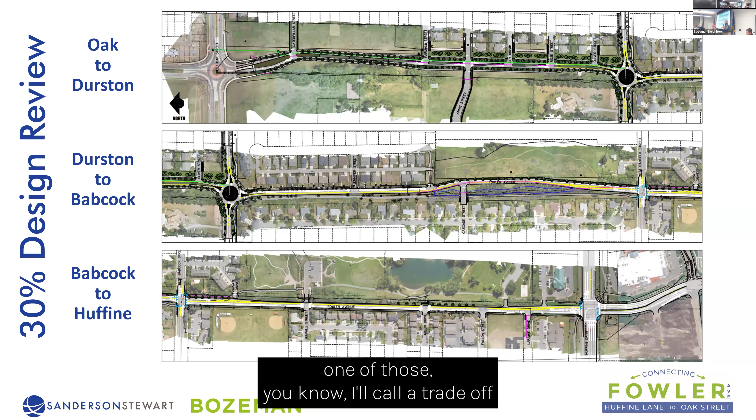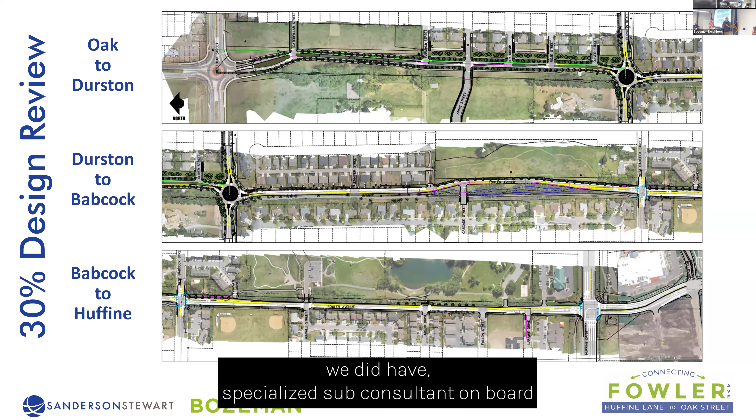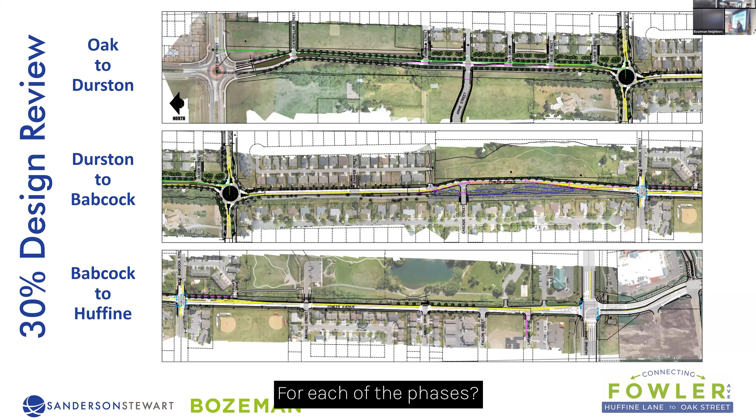Can you review the dates, please, for each of the phases? Sure, let me find that. I don't have dates on this slide, but phase one, the north section from Oak to Durston, is planned to go to construction in 2026. The middle section, phase two from Durston to Babcock, in 2027. The south section from Babcock to Huffine in 2028. And if we do have to spend money on the intersection, we'd do that the following year. All those dates and timelines are dependent upon design, right-of-way acquisition, and permitting. That's our goal right now, where it's at in our capital plan, all subject to change.

Discuss fiscal year versus calendar year. I was using calendar.

I have a question on snow removal. Where are you going to put the snow? Sure, one of the functions of our boulevard space, that grass strip, is snow storage. We'll have a minimum of 7-foot boulevard strips in all directions. We estimate clearing one lane needs a minimum 5-foot boulevard, so 7 gives us a little bit of buffer. Primary snow storage would be in the boulevard areas. In big snow years, not so much this year, we do tend to have to do a little bit of hauling around intersections where you run out of space adjacent to the road.

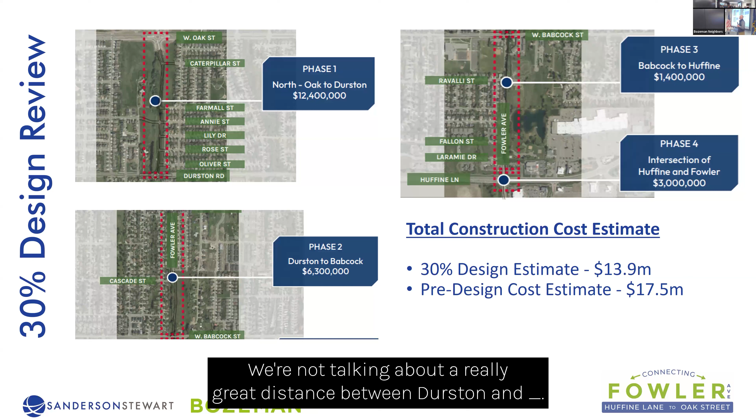Regarding secondary street connections, like Annie Street or Cascade, those are going to impact those riparian areas and the trees, and that's where you're going to have to do the piping, so we're losing the open ditch. There's the environmental impact, and there's also the impact to those streets. I do understand you want really good connectivity, and we're not talking about a really great distance between Durston. With those secondary streets, I've already heard on social media people in Valley West, for example, saying great, we're going to take Cascade to get to the Fowler connection because the school zone there at 15 miles an hour is too slow. So we are going to have impact on these neighborhoods, and there are a lot of school kids walking. So mitigations to keep the speeds down, to keep the traffic down, and even just considering not connecting some of those streets where they impact the riparian.

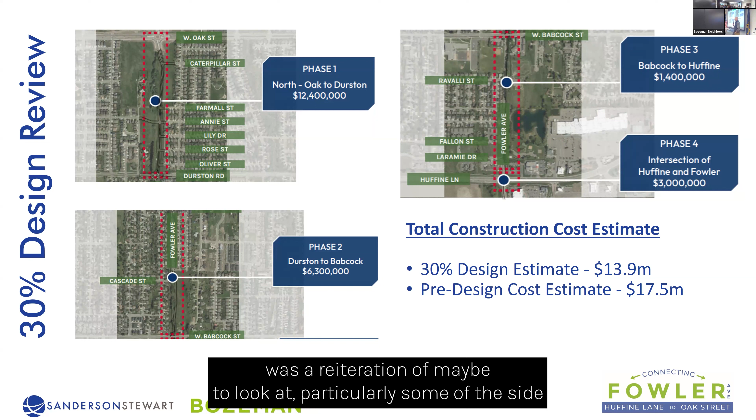So the last question was a reiteration to look particularly at some of the side street connections that cross the ditch corridor and the impacts to those trees. We can certainly commit to looking into that before we get to 60% design. Good thing to maybe take a look at when we do our second phase.

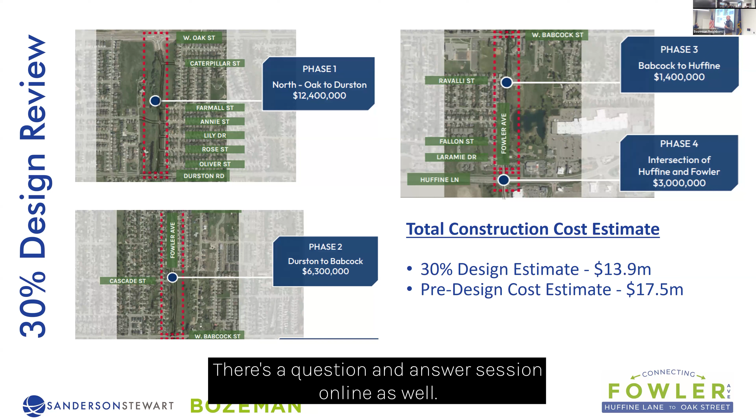Thank you, everyone. Thank you, Aaron. Really a helpful forum. Yes, thank you.